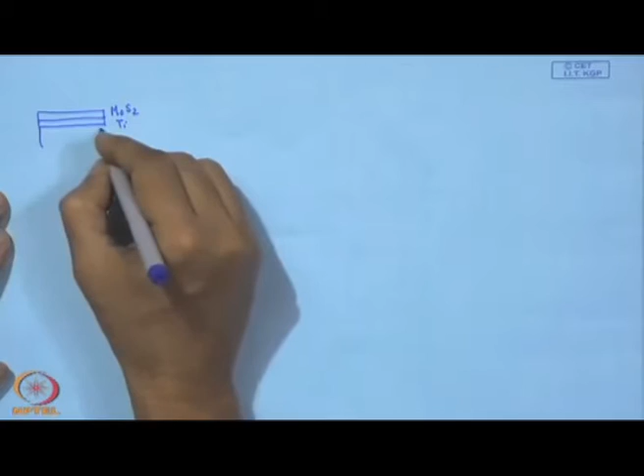Now for this architecture, we can have at least 6 possible architectures. Let's have a quick look at this. We know that MoS2 with a sublayer of titanium, and then substrate - this is one possibility, one extremity giving super lubricity.

However, we can have another extremity where we just have TiN, well known for its hardness and wear resistance, with just one adhesive layer, and S means the substrate. So these are two combinations - this is architecture number 2.

We can have the third one, and it is something like this: first of all we have the substrate, on that a thin layer called the adhesive layer, over that we can have TiN, and on top of that we can have MoS2. So this is also possible - architecture 3.

Now we can have a fourth option here. This is actually now a combination, it is no more a monophase. This top layer is monophase, this is also a hard monophase, this is also a top monophase, but it is a multi-layer, and this is going to be a co-deposited coating.

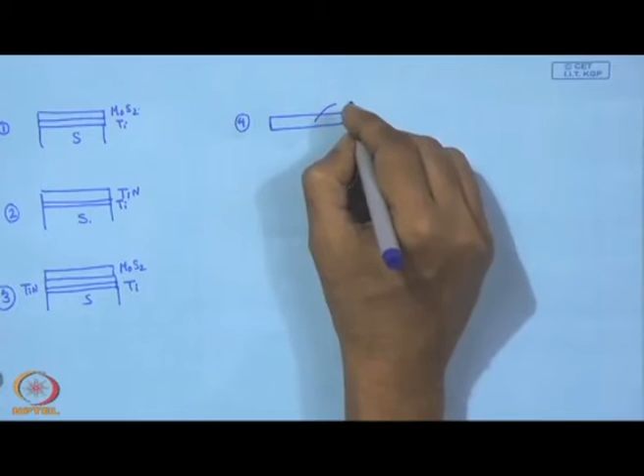That means on this coating we have both MoS2 and titanium nitride together, and over this what we have is just titanium, followed by the substrate.

The fifth option we can have would be this architecture: MoS2 plus TiN followed by the foundation layer of TiN, then we have just substrate.

Similarly, we can have another option, the sixth: here we have, as part of this development work, MoS2 plus titanium followed by one titanium hard layer, and then adhesive titanium and substrate. Here too we have adhesive titanium.

So we can examine all these 6 architectures and judge which one gives the best performance. Following this, there can be process variables of sputtering, and by varying those we can find out which is the best condition for sputtering.

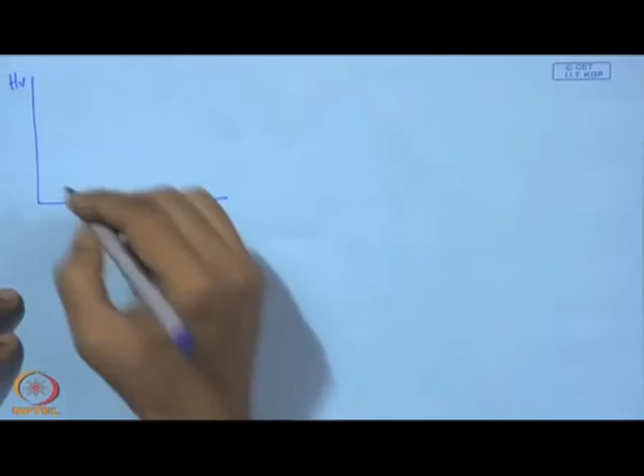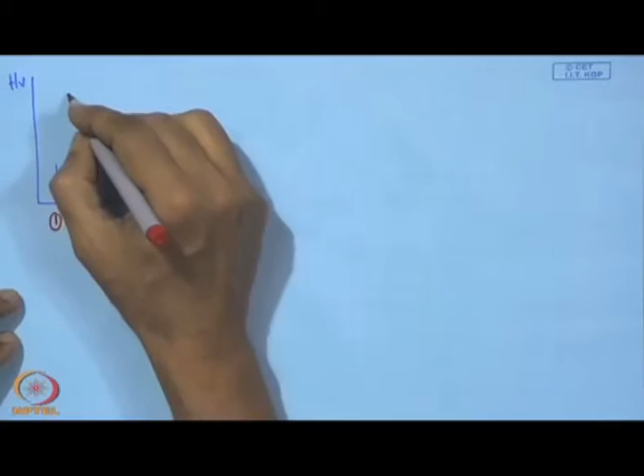When we have such architecture, we can plot the hardness HV for each case - this is number 1, and number 2 will be very high, for obvious reason, because number 2 is just titanium nitride, which is known for its hardness.

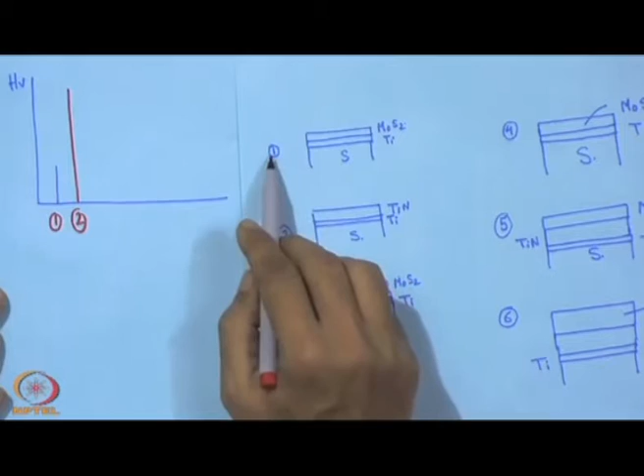So, we expect a higher hardness, followed by number 3, and this number 3 is actually MoS2, which is supported by this TiN. So its hardness will fall, but we can see the bulk hardness of these three will be more than that of one, because here we have a support of TiN. So that will be somewhere little below this one.

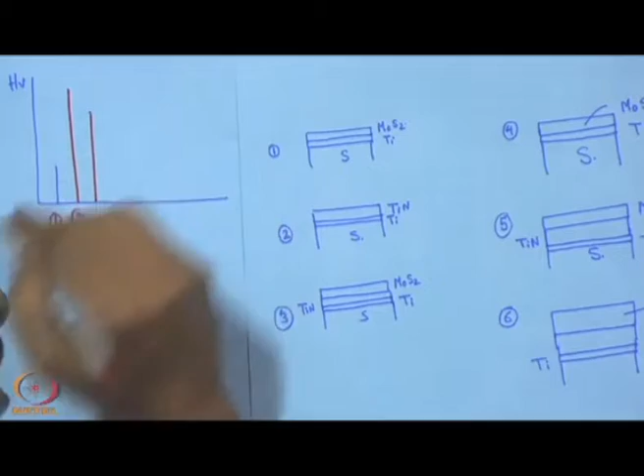And then we have number 4. In number 4, what we can see is that it is a composite coating, but with no support layer of TiN. So it will give a bulk value which will be more than MoS2, but less than that of TiN. So naturally, when we compare that value of TiN, this will be less than that one. So we have something somewhere here, and this is going to be 3, and that is going to be 4.

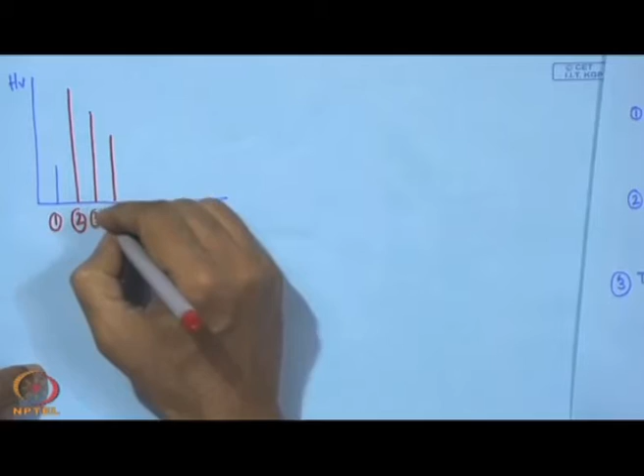And then we have number 5. This number 5 distinguishes itself from the rest, because in this case we have a composite architecture at the top, but we have a supporting layer of TiN. So this is one of the very hard coatings, and in this case we have TiN, and at the same time at the top, MoS2 plus TiN. So we expect a hardness which will definitely exceed that of 3 and 4, but it cannot be more than 2 because it is not TiN and it is just a composite. So it has its own effect, and as a result we have this hardness somewhere here. So this is 5 - architecture 5, which gives a hardness more than 3 and 4, but less than 2.

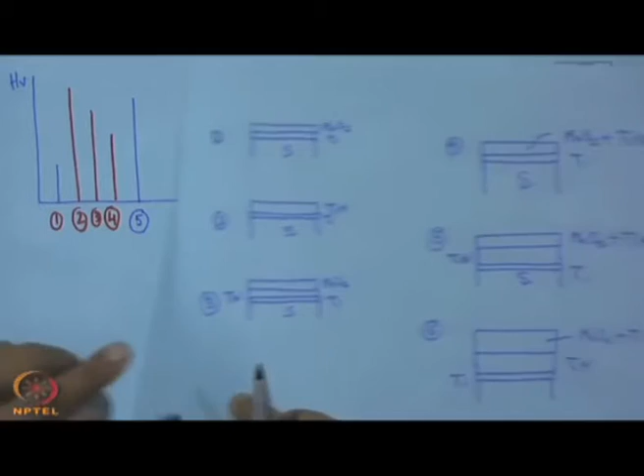And then we have this MoS2 plus TiN, and this is going to give a hardness somewhere little more than this, so it will be 6. It will be less than 5, but more than 4. So this is the distribution of hardness.

So this is one way we can find the hardness distribution, but one thing of immediate interest next will be what we call adhesion - that means this critical load, critical normal load which causes the first failure of the coating. In this scale, if we put the bar diagram, we can find this for 1, 2, 3, 4, and this is actually what we find here. This is 1, 2, 3, 4, 5, and this coating - that means the coating with this architecture of MoS2 and TiN at the top - with a coating interlayer of TiN, that gives a good adhesion, and this is actually the value we can see here.

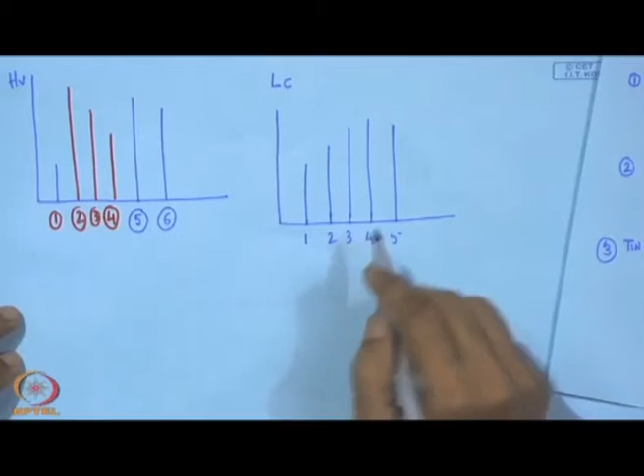Now comes a very important thing. So for 1, 2, 3, 4 and 5, what we see here is that the adhesion of this one is not so good. Now in this case, what happens with this combination is that the resistance to fracture and resistance to crack of TiN - which is rather coarse grain here and which becomes little bit micro grain - so resistance to cracking and resistance to fracture becomes more, and because of this grain refinement, we expect a better adhesion in this case.

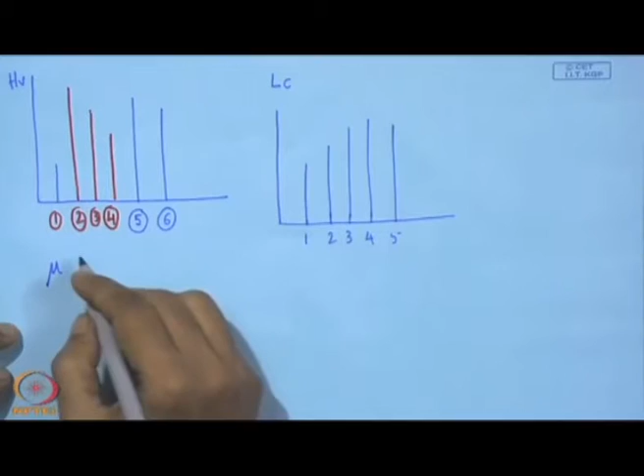Now comes what is important - coefficient of friction. Coefficient of friction is actually what one can find out in the pin-on-disc test, that means it is a tribometer with the pin on disc. What is also our observation is these samples - C1, C2, C3, C4 and C5.

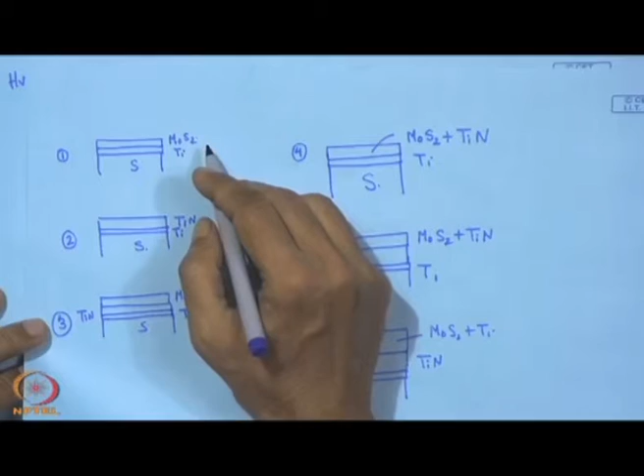Now here, obviously, since one is having just pure MoS2, from the standpoint of lubricity that is going to be the best one. However, that is short lived - the life of this coating is very short. However, when it is mixed with - when it is number 3 with a support of TiN - the life is actually more compared to that one, so it gives greater support. So what we find also, compared to this 4, 5 is a better one, and this is because of this support of TiN.

So what we can show here is that for C1, the coefficient of friction is the lowest, followed by C3 as the second lowest, then C5, and finally C2. So in that scale, C1 happens to give the lowest value of coefficient of friction because of this MoS2 and TiN, though it is not a lubricating coating, it is a wear resistance coating.

In this respect, what we find is that between C3 and C5 - that is the one with MoS2 with a TiN support - that gives the second best result, and then we have this MoS2 with TiN and a TiN support, which is the third one in that ranking.

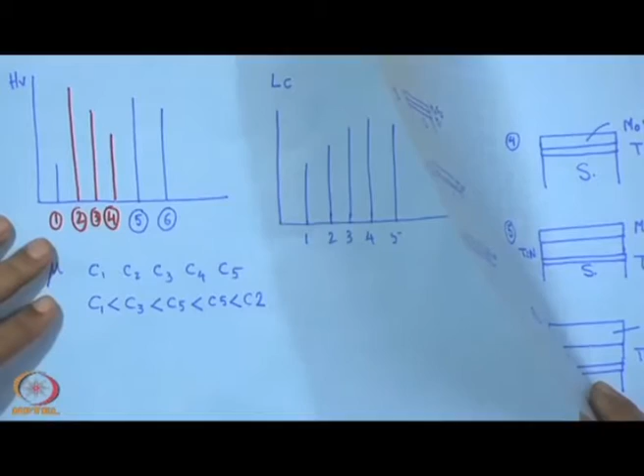Now apart from that, what is also important for us to know is the wear coefficient. Wear coefficient is actually the wear on the track, that means on the disc which is coated. On that disc we have a wear channel, and from the depth of that channel we can determine the wear coefficient - the volume of wear on that circular wear track, divided by the normal load applied, multiplied by the distance travelled by this normal load.

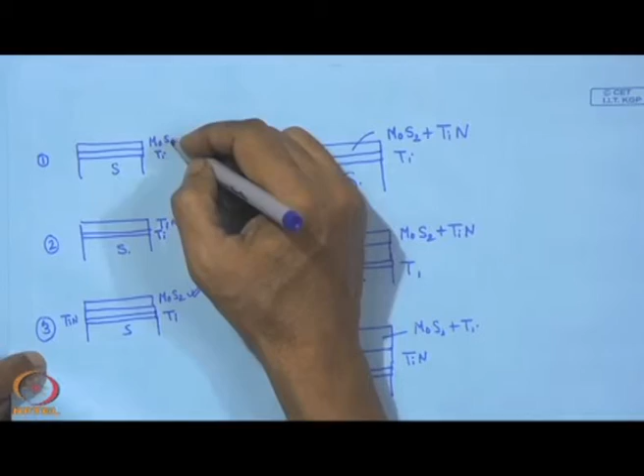So from that point of view, what we can find here, we can show this thing - this is wear coefficient. So here what we find is that the wear coefficient of coating number 1 shows it is not that wear resisting, though friction value is quite low, but that is only for a small period of time.

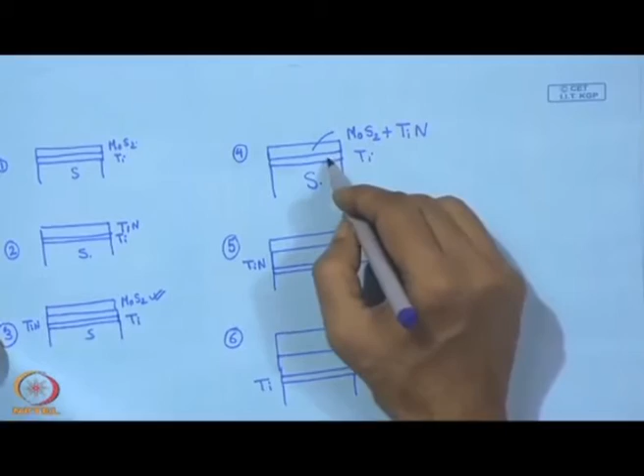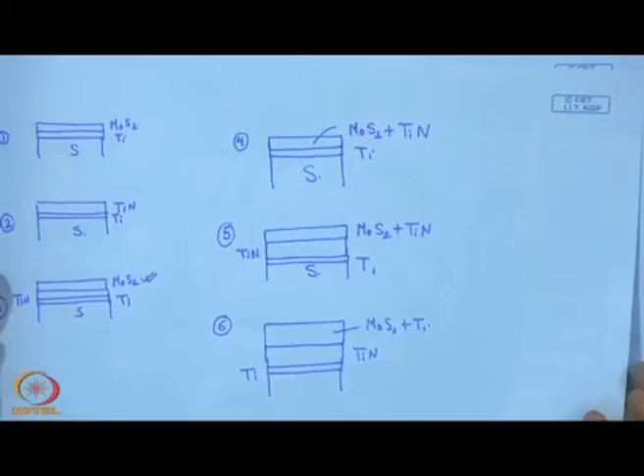And then we have here 2, 3, 4 - this is number 4, that is a composite coating without any support. And finally what we have is number 5, and this 5 means it is a composite coating with a support of titanium nitride, and that also gives quite a low value for this coating.

So from this point of view, what we find is that this fifth one - the architecture with MoS2 plus TiN with a support of TiN - gives one of the best values considering hardness as number 1, adhesion with the substrate as number 2, coefficient of friction as number 3, and number 4, the wear coefficient, meaning how much wear occurs.

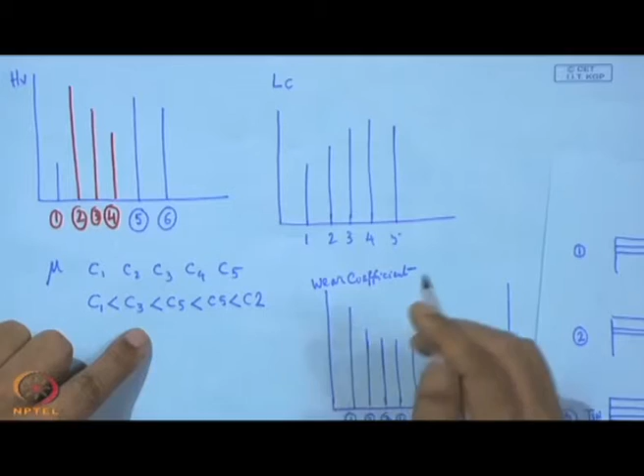So with all this consideration, what we find is that this number 5 particular architecture - the architecture which consists of... this is the substrate...

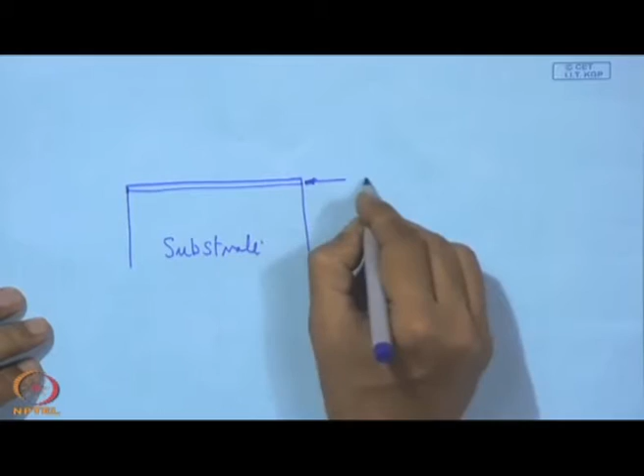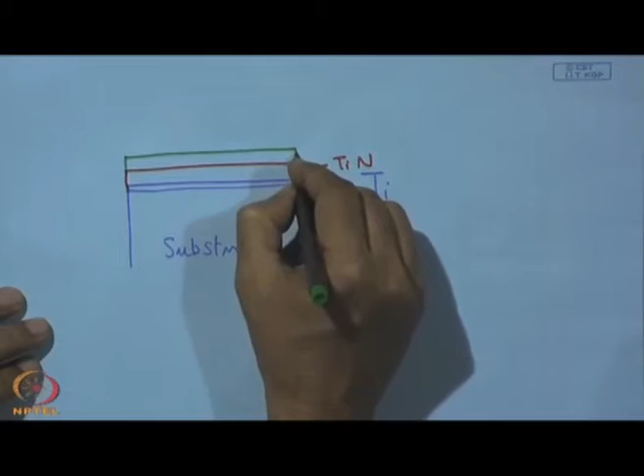Here we have a Ti coating, this is Ti, and on top of that it is TiN, and finally the functional coating - this one is actually MoS2 plus TiN.

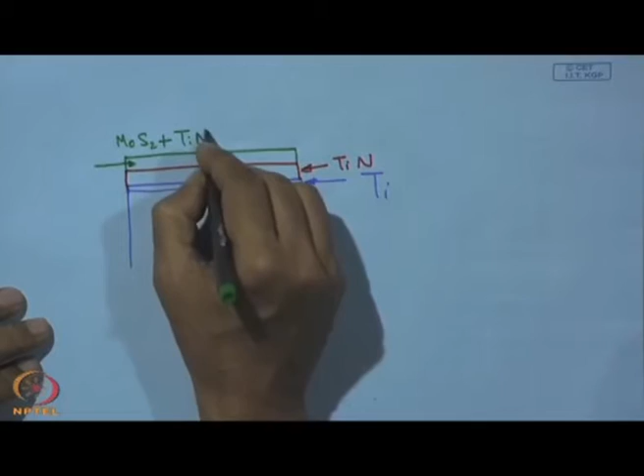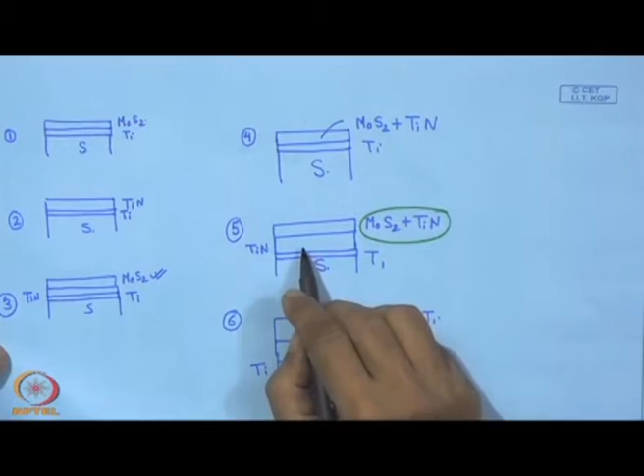So this is the architecture. Out of this, what has been found is that this particular architecture with a support of TiN is found to have the best overall performance considering all factors.

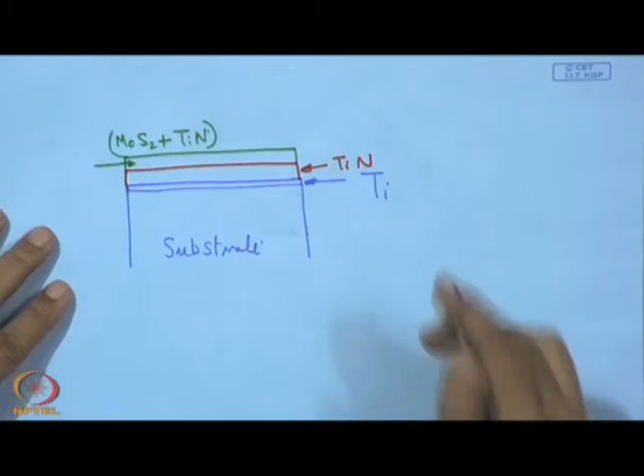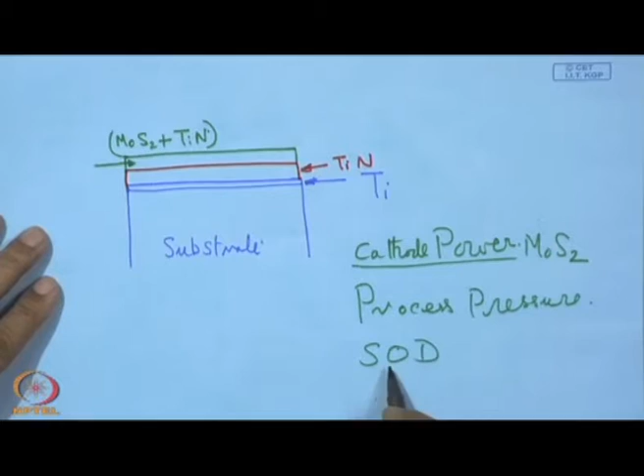Now here is one thing we should also look into. During sputtering of MoS2, what happens is that the cathode current or cathode power of MoS2, and also the process pressure - these two, along with the stand-off distance SOD, that means the distance between the cathode and the substrate - from this there is a relation. If the cathode power and process pressure, considering SOD, are not properly chosen, then instead of getting a value of 2 we may end up with something MoSx, where x is not equal to 2, in most likeliness less than 2.

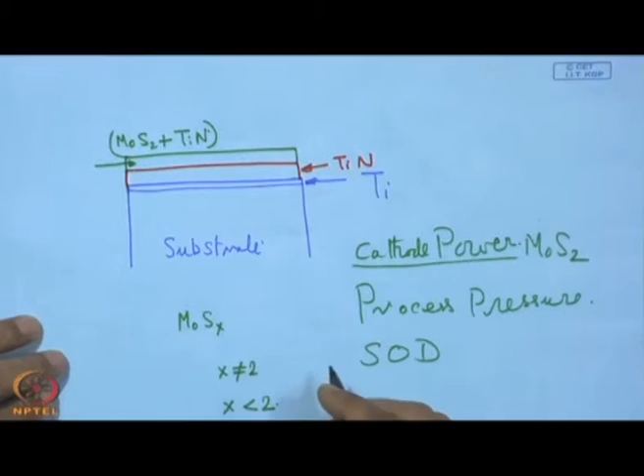However, it is also our observation that even with a value less than 2, we can get a good coating with the desired basal plane parallel to the substrate surface, and also a tribological coating which offers a low value of coefficient of friction. So it is actually more reasonable to write MoSx instead of MoS2, where this x value would depend upon the cathode power, process pressure and SOD under a given set of conditions. So this is MoSx coating, presenting this in the general form MoSx.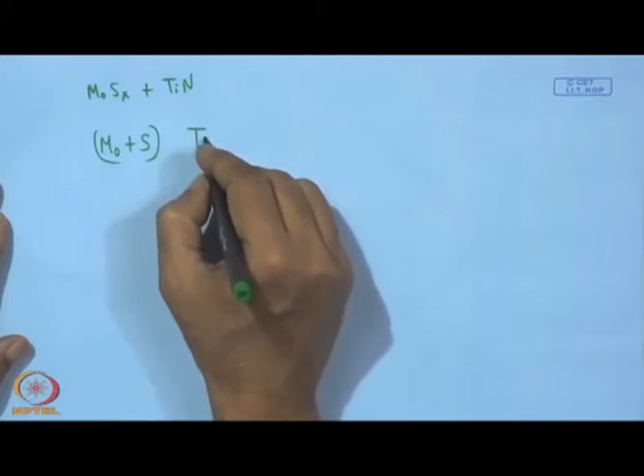Now this MoSx with TiN - the most important thing here is what will be the proportion, the atomic percentage, of MoSx plus TiN. So one would be interested to know what will be this Mo plus S within this TiN - TiN on one side and Mo plus S on the other.

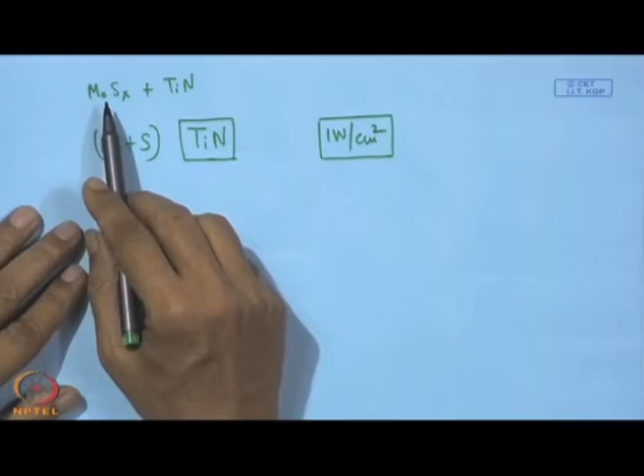So, this is something quite important and interesting to know. There is an operational restriction on the cathode power of the MoS2 target, about 1 watt per centimeter square, and with this it may not be that easy to vary the cathode current for the MoS2 target. That means molybdenum disulphide cathode current cannot be conveniently varied. On the other hand, what can be handled rather easily is the titanium target, titanium cathode current, and that has been done.

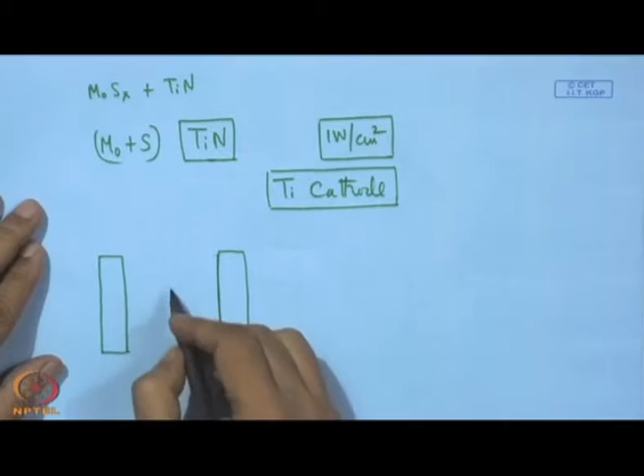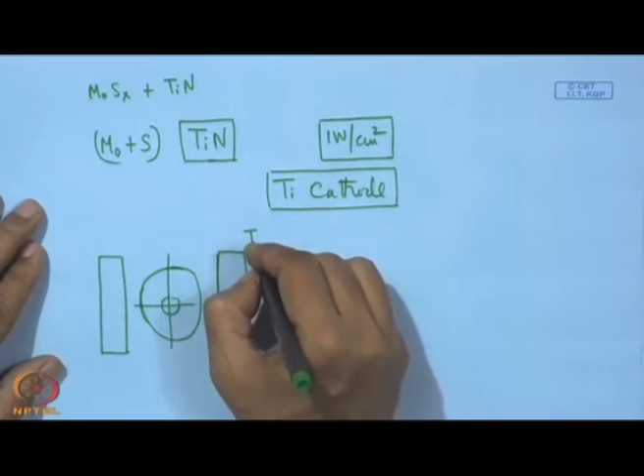That means, in this process, what has been done, if we consider it is actually a dual cathode machine. In this dual cathode machine, this is the rotary table, and here we have the titanium cathode and the MoS2 cathode. So, what can be done in this dual cathode system?

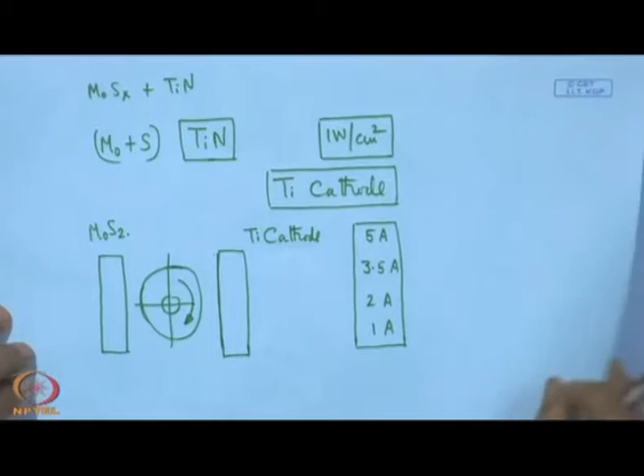The titanium cathode current could have been varied, say from 5 ampere to 1 ampere. This is just by way of illustration. Any other combination is also possible, and with that we can also see the effect of this on the overall performance. Now, with this, what we can find is the percentage of MoS2.

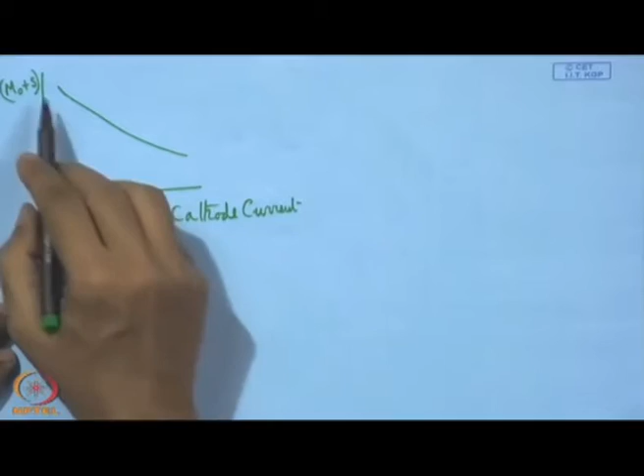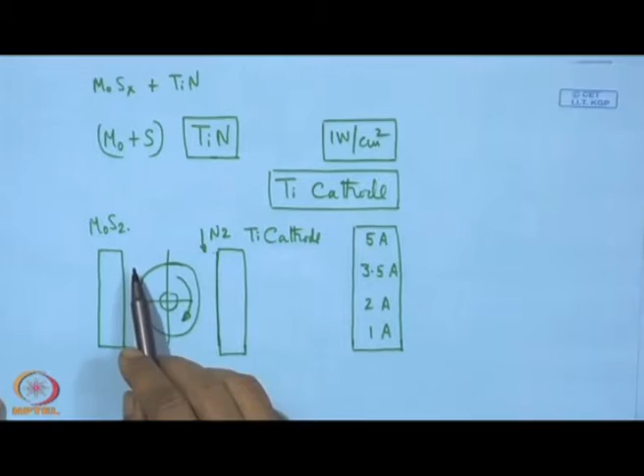So, what we get is something like this, plotted against titanium cathode current, versus percentage of MoS2. When we have a higher value of titanium current, naturally we have a higher percentage of titanium nitride in the coating. So, this is actually a reactive sputtering, where titanium and nitrogen combine to form titanium nitride, and then MoS2 as a whole is deposited. So, it is reactive sputtering of titanium nitride and direct sputtering of MoS2 using a pulse DC system.

And we have another observation in this case, that is the S by Mo ratio. So, what we have seen so far is the effect of coating architecture that we have just discussed. With this coating architecture, we found that the MoSx plus titanium nitride coating architecture gives the best overall performance, considering adhesion, hardness, frictional characteristic, and wear coefficient. Considering all this, we saw that this is the best overall performance.

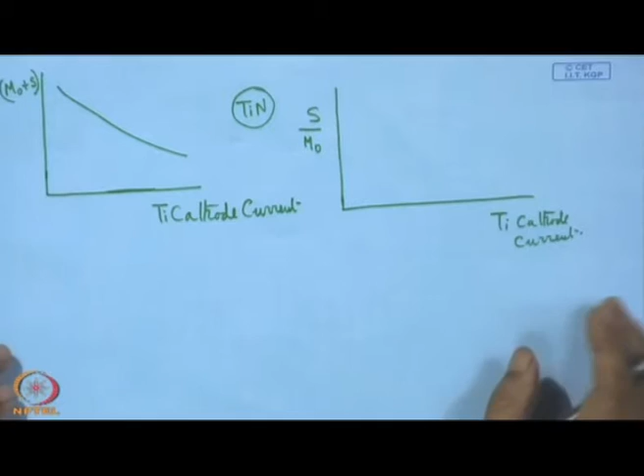Now, what we can find here is this TiN-MoSx coating, the influence of Mo and S content, plotted against Ti cathode current. So, what we can see here is grain size, that is also one thing.

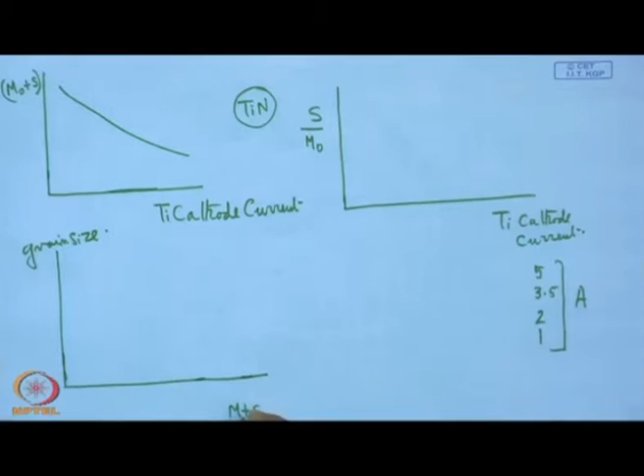Now, with this variation of cathode current, say from 5, 3.5, 2, and 1 amperes, we can see the grain size plotted against cathode current or Mo plus S content. What we find is it is falling: here it is about 2 atomic percent, here about 4 atomic percent, this is about 12.75, and this is about 16.75.

So, this is a condition of deposition where the process pressure was 1.5 millitorr, MoS2 cathode current was restricted to 0.5 ampere, and the cathode current of titanium was varied. So, with this we can get a grain size of this order, and then comes a very important thing.

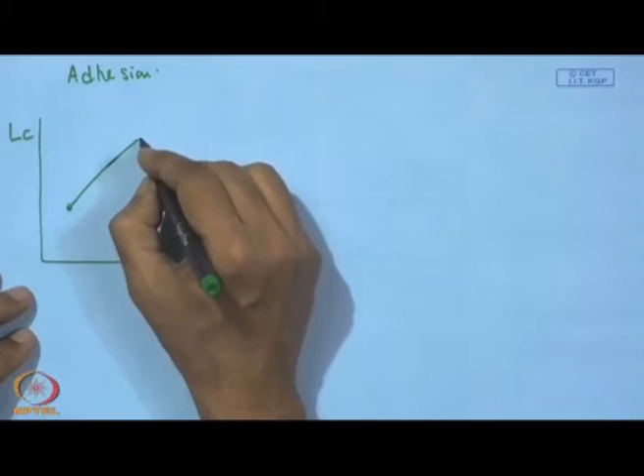That is actually the surface, that means the adhesion. So, with this, what we can see here is the LC, critical normal load, and this critical normal load turns out to be like a rising and falling curve.

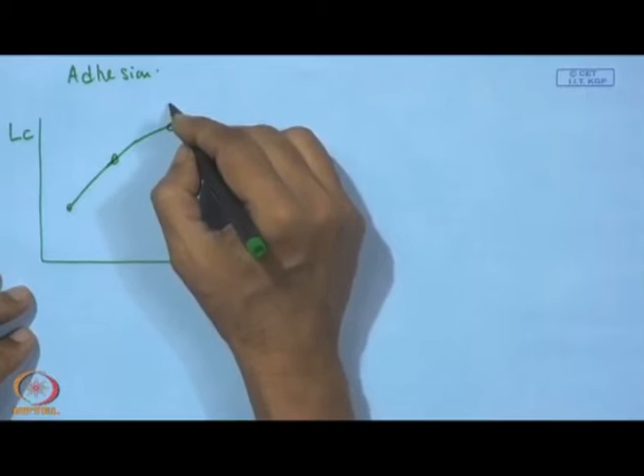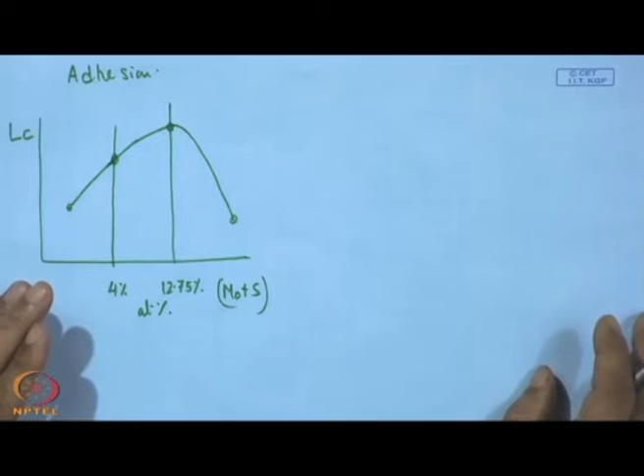So, this is actually a zone where we have a good result. That means the good result is somewhere around 4 to 12.75 atomic percent of Mo plus S, where we can get a good value of LC, that means the adhesion. But when it is below that, it was dropping sharply, and here also it has a very sharp fall. So, this can be considered a zone where it is expected to give a good result.

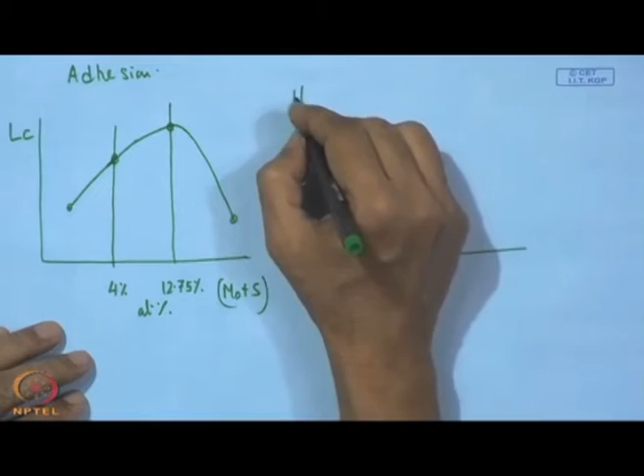However, hardness-wise it is continuously falling. The reason is as follows: the higher the percentage of MoS, naturally this is going to be a soft phase, and with this soft phase, the compound hardness, or the average hardness of this composite structure, is affected, because this is going to be a composite structure. Here, this is going to be the structure: Mo plus S, and this is titanium nitride. So, when we measure this hardness, the influence of the substrate definitely comes into picture, and here we have MoS plus also.

So here we have Mo plus S, which is in the form of MoSx plus TiN. Higher the percentage of this one, naturally when we measure the hardness, it has its own influence, that is why it has a drooping curve.

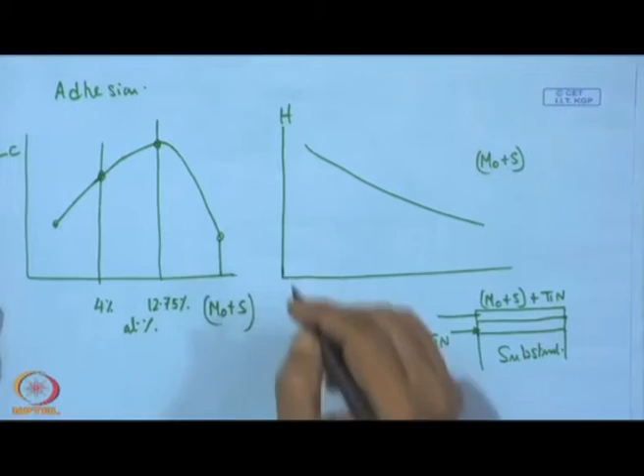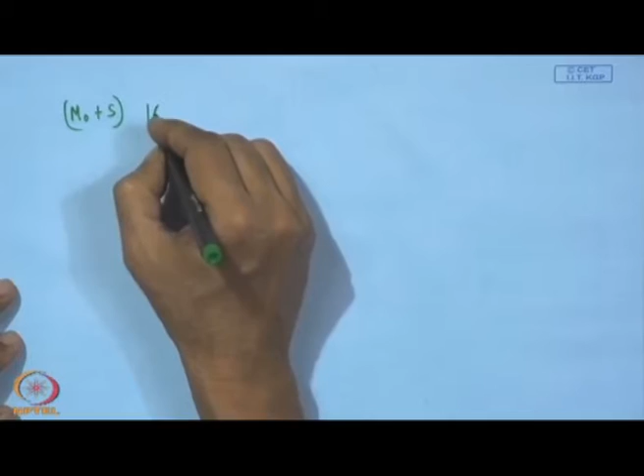Now when it is coefficient of friction, if we put this way, the coating with the highest value is going to give low friction, that means this coating with MoS at 16.5%, then we have one with 12.75%, then one with 4%, and this one with around 2%, corresponding to 1 ampere cathode current. This is 2, this is 3.5, and this is 5 of titanium cathode current.

Titanium cathode current. So with this what we see, the friction coefficient for this one is going to be the lowest, followed by this composition. So lower the value of MoS, higher will be the coefficient of friction.

However, what is very important here to know is that in this case we also have another term, what we call wear coefficient. So when we consider the wear coefficient, definitely we find that this wear coefficient of these two, that means percentage-wise, is much better.

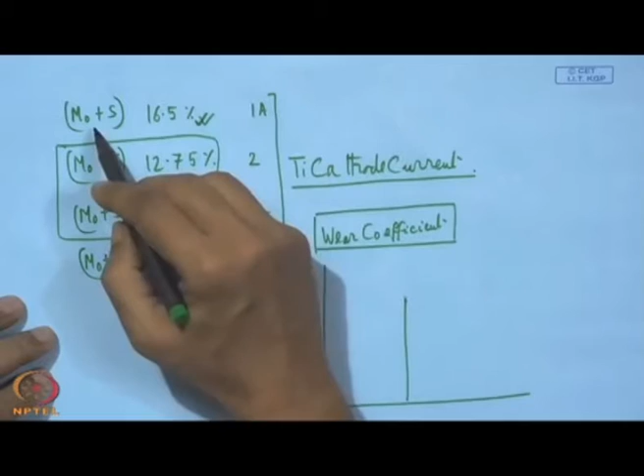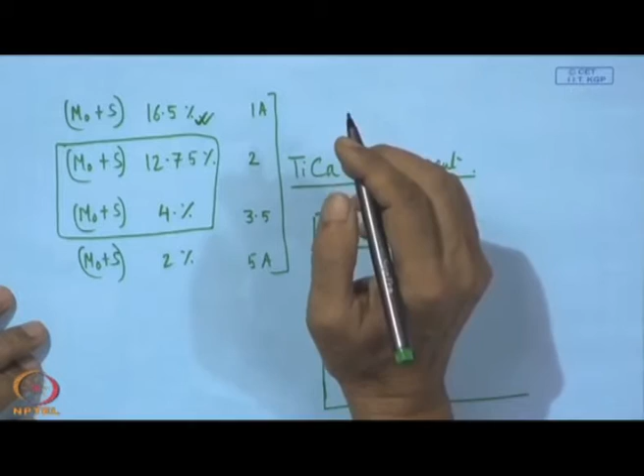That means a range within this 12.75 atomic percent to 4%, that is going to be a good condition for deposition of this composite coating, and in this case we can get a good value of wear coefficient, and this is just a balance between titanium nitride content and that of MoS content, and at the same time the coefficient of friction can also be obtained with a rather favorable value.

So this is actually on one side the coefficient of friction, and on the other side this is also the wear coefficient. Now considering these two, what we find is that this value, in fact wear coefficient, will be quite high on this side.

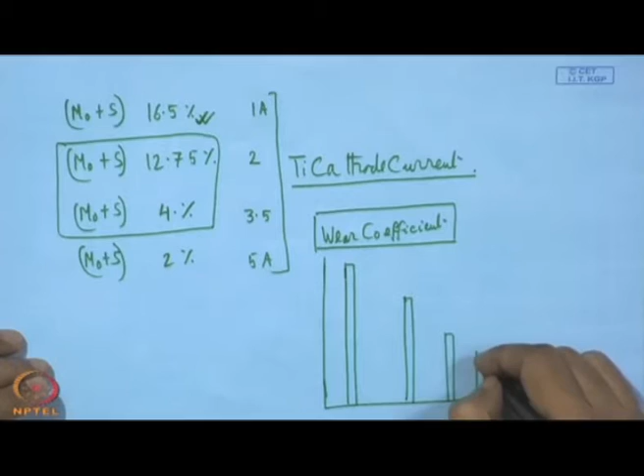Now in this case, this is actually the percentage of 16.5, 12.75 or 4. However, what we can find, considering the coefficient of friction and wear coefficient, is that this zone is not too big compared to this one. So this is actually a zone where we can find one of the good performing coatings.

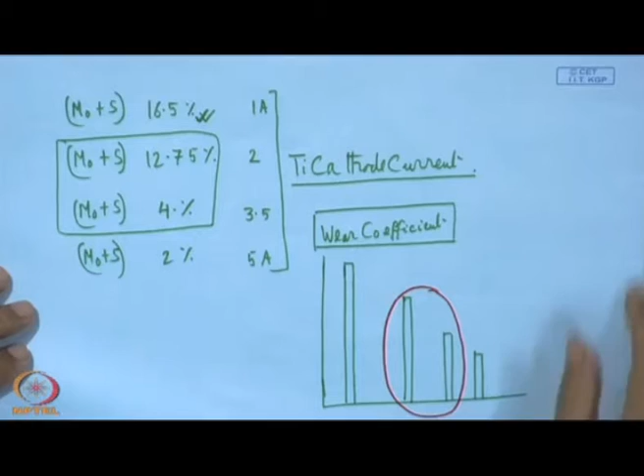Considering this value of critical adhesion load, critical adhesion normal load, and also the coefficient of friction which has been explained, and at the same time the wear coefficient, this is a percentage, atomic percentage, of molybdenum plus sulfur inside the top functional layer, which can give a favorable value of wear coefficient, considering the other two properties, that means the coefficient of friction and also the critical load of adhesion.

Now comes the effect of substrate bias. We understand that the effect of substrate bias is to improve the hardness of the coating, to improve the density of the coating, to neutralize any stress which can build because of temperature, high temperature, and a wide difference in coefficient of thermal expansion and also the modulus of elasticity. So the role of bias is well understood.

However, what is the best value of this substrate bias is something one also has to look into, because too much substrate bias can also cause re-sputtering of the coating, and then the growth rate can also fall. Not only that, in addition, too much energy of impingement, that means the impinging ion, can also cause too much interaction at the interface, promoting diffusion across the interface, and as a result a thick diffusion layer may form, and this can also be counterproductive in that the adhesion strength, the critical value, may also be affected, and hardness value may also be affected.

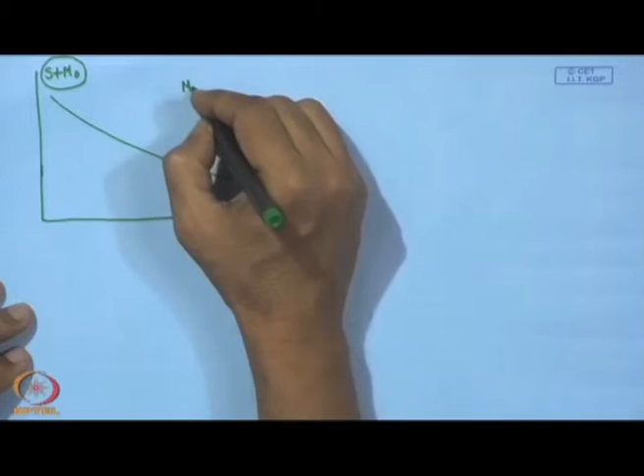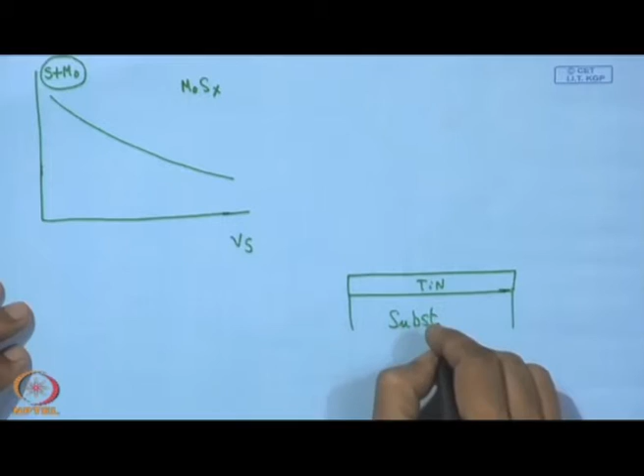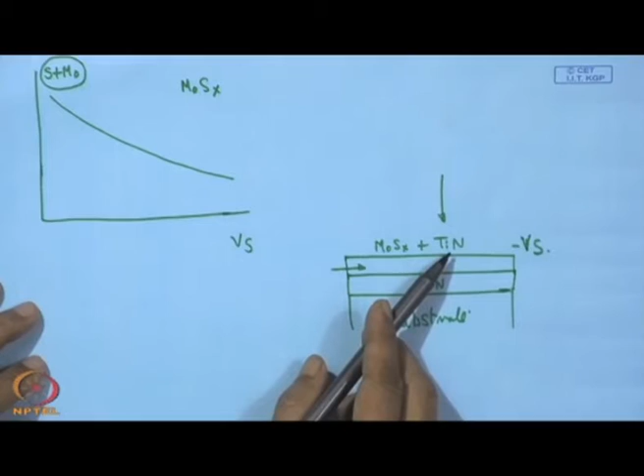MoSx actually gets re-sputtered from this coating. The coating is here - this is titanium nitride, this is the substrate, and on top we have MoSx plus TiN. When we have a high value of Vs, the substrate bias, this energetic incoming ion will impinge and bombard this surface, leading to re-sputtering of MoSx preferentially in comparison to titanium nitride. As a result, in this coating we can have less MoSx and relatively more TiN. This point should also be taken into consideration.

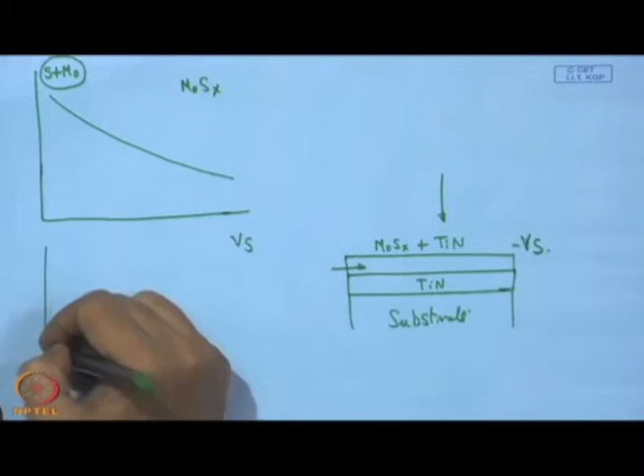Then another thing: the S-Mo ratio. This is also very important if we consider the tribological property of this coating. It is S-Mo ratio versus Vs. Not only does S plus Mo keep falling, but within the S plus Mo that remains inside the coating, the ratio of S and Mo is also falling. That means, if we increase Vs, in this MoSx the value of x will keep falling, and with that fall we may arrive at a situation where this combination of molybdenum and sulfur, in a substoichiometric sulphide form, will not be able to give any tribological property, and the whole purpose will be defeated. This has to be taken into consideration.

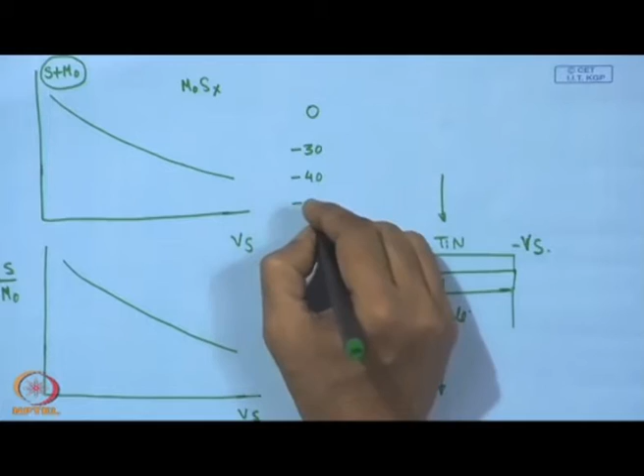So normally, say bias voltage - if one considers increasing bias starting from 0, say minus 30, minus 40, minus 60 and minus 90, this is the range. So if one tries to examine the effect of the substrate bias voltage, one should expect such kind of variation with increase of bias voltage.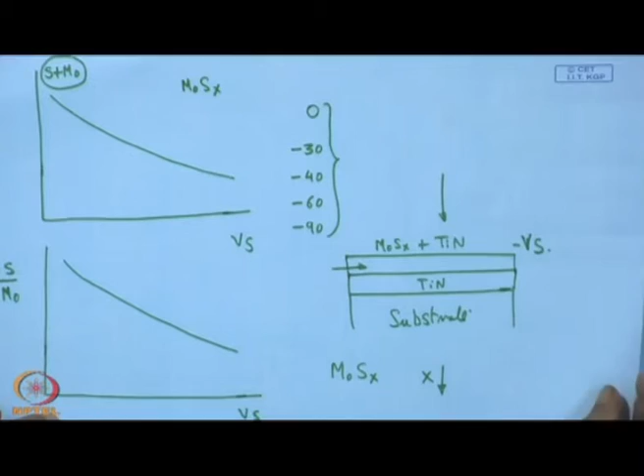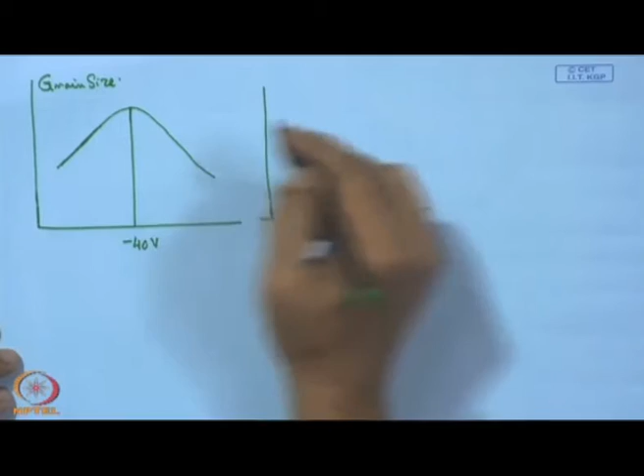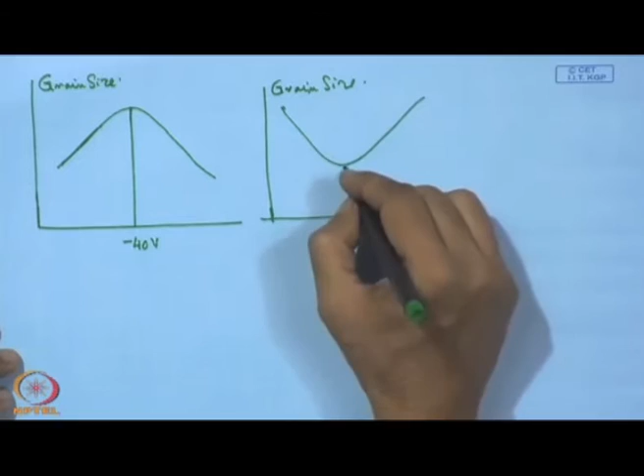Now comes grain size. This is also important considering the refinement of the coating and surface roughness of the coating. Here we find that grain size has such a variation, and around minus 40 volt we got one of the... it should be like this, the grain size curve. So it is somewhere like this - this is the grain size here, around minus 40.

This grain size can also be looked into from XRD. When we have this XRD diagram, it is typically of this shape, and this is the angle which gives a 2 theta value corresponding to the 0 0 2 plane. From the shape of this XRD diagram, one can also have a fair assessment about the grain fineness.

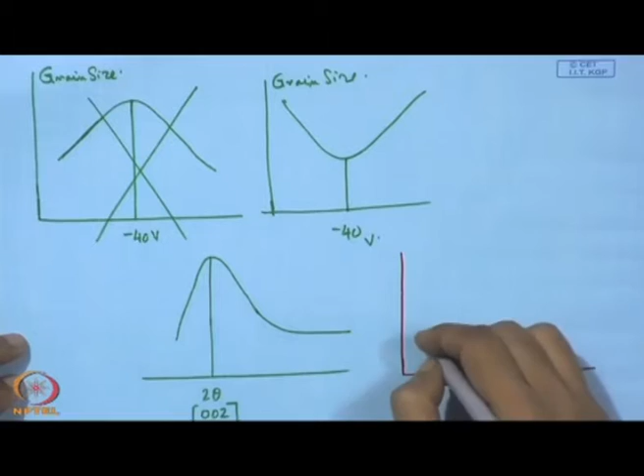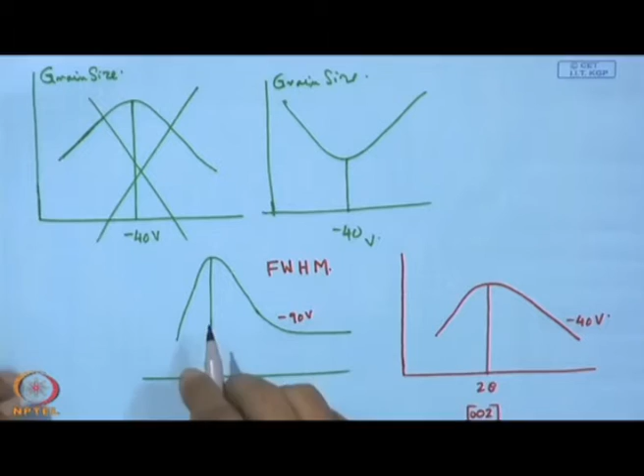So what we call full width at half maximum - if we consider this full width at half maximum of the XRD, we can find a graph. We can also have a graph which is quite wider compared to this one. When we see a wider XRD peak at the same 2 theta position, this gives a finer grain size. This may be a graph with minus 40 volt, and this may be a graph with minus 90 volt or minus 60 volt or 0 volt without any bias. So from this XRD diagram, one would be able to locate the condition around which grain has the finest or smallest size.

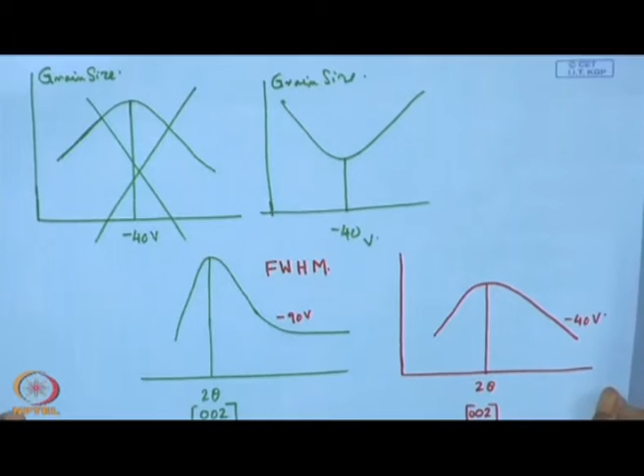So this grain size refinement is also the result of this substrate biasing.

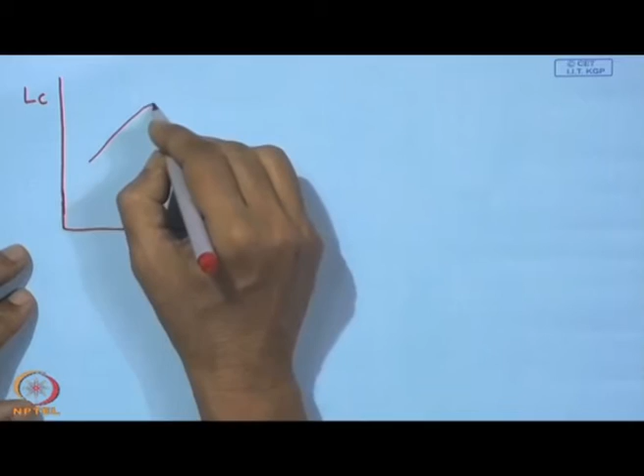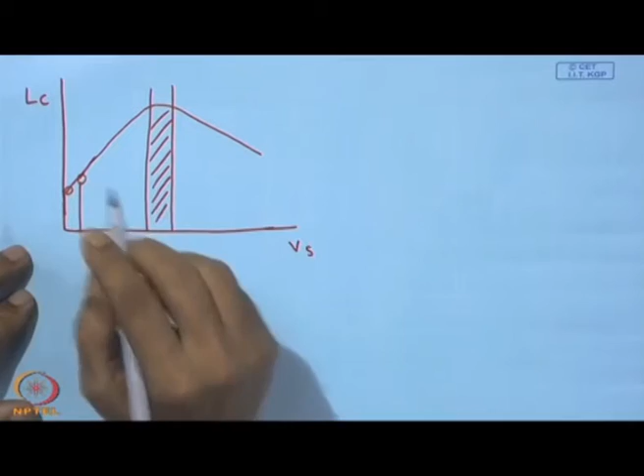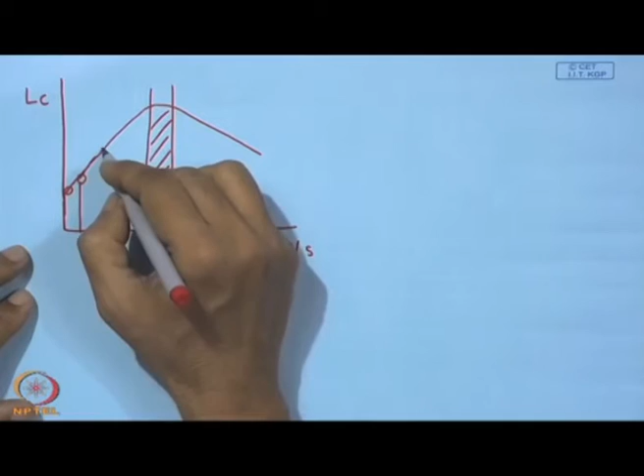Similarly, what we can do is look at adhesion of the coating. Adhesion of the coating is also important - that is the most important property one should look for. So this is LC versus bias. Here also we see this kind of graph, and this may be a zone of intermediate interest, around minus 40 volt. This is actually 0 volt, where we have one of the lowest LC value, that means the critical adhesion strength, and this is maybe around minus 30, but on this side it's minus 60, and this is going to be minus 90.

So what happens in this case? Too much stressing at the interface, and also because of very high energy availability, too much diffusion or a diffusion layer, while on this side there is no diffusion. So no diffusion or too much diffusion - both are counterproductive. A value in between could give one of the very best results so far as adhesion is concerned.

Hardness can also have a curve like this with substrate bias, and here also a zone we may come across around minus 40, and this is where we have densification of the coating, closing all the pores and voids. However, if we go further, too much compressive stress gets frozen inside the coating, and the material becomes too brittle. When the indenter tries to penetrate, instead of plastic deformation, this loading leads to crack propagation, because the material cannot undergo even the smallest plastic deformation, resulting in lower surface hardness.

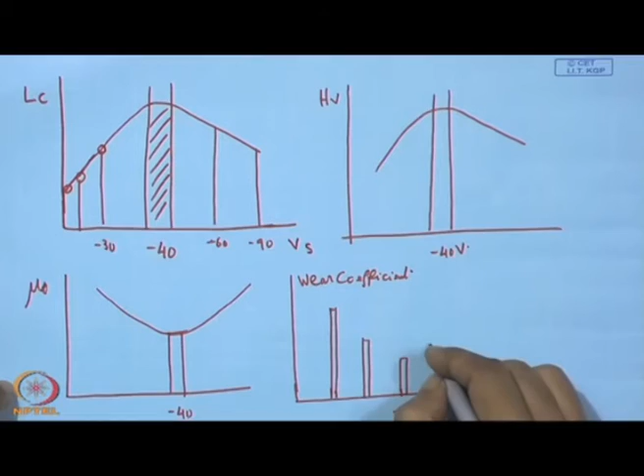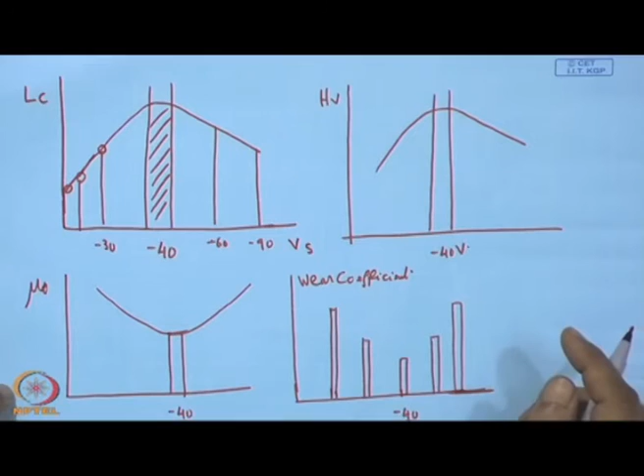This is a measure of wear on the ball or also on the disc. Here also we find high wear with low bias, but somewhere around intermediate value of minus 40 we get one of the lowest wear amounts, and that is because of the hardness of the coating and low value of friction, so the coating can give one of the best possible performance in actual practice.

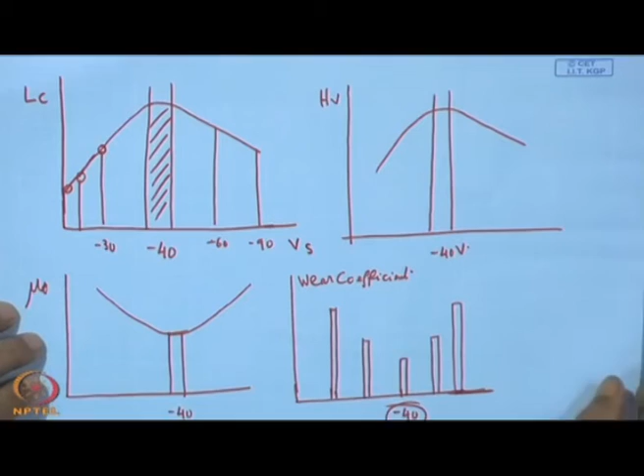So as a summary, we have examined various types of coating architecture. One may be just molybdenum disulphide. However, it is known that molybdenum disulphide alone cannot work effectively for all practical purposes in normal atmosphere, and that is why it always comes with material like titanium, chromium, and similar transition group materials to improve its properties—protecting against moisture and oxidation, and holding the 002 basal plane parallel to the substrate surface.

These are the major roles of these elements which are added in small quantity, their atomic percentage hardly exceeding 10-15%, and with that the coating's capability or performance could be raised remarkably.

However, it has been found that this coating performance can be augmented further just by putting a hard surface layer beneath the top functional tribological coating, to have a better and much improved bearing surface. That means the load bearing capability of the top functional coating can also be improved, and that is why there has been a lot of attempts to put some transitional element metal nitrides, one of those being titanium nitride.